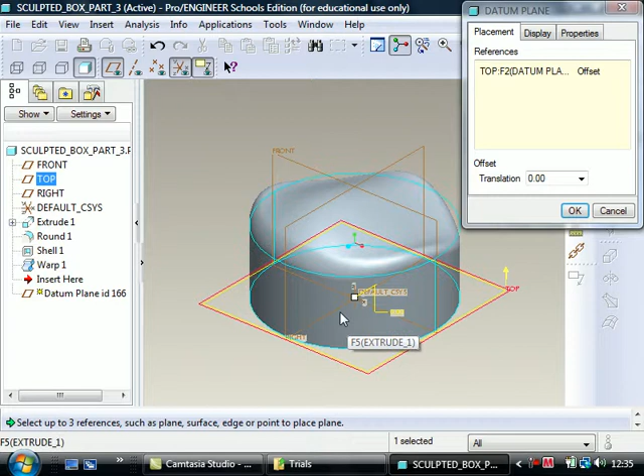To do this I need to create a work plane at the distance from the base of the box at which I wish to split the box in two. I'm therefore going to distance that from the top work plane, and I can move that up either with a grab handle or by putting in dimensions.

To make it a little bit easier, I could change the view, so I'm looking at my design from the side to see, just to check how it is working out. I can use the view option to achieve this. So you can see I've now found the lowest point in the sculpted top of the box, and therefore I can move the plane down accordingly.

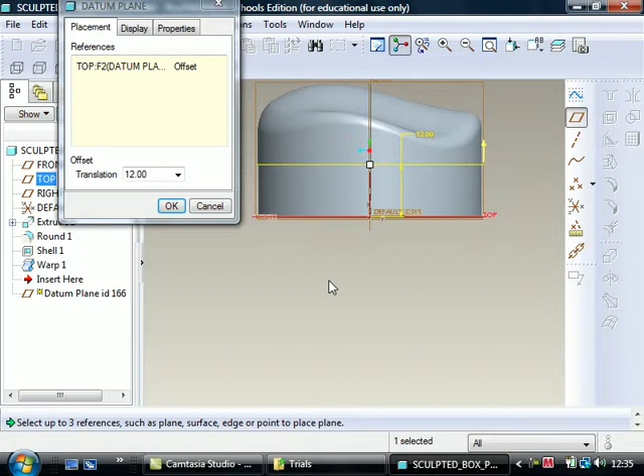Now I decided from that to make it 12mm up from the top datum plane, and I OK in the window for the datum plane. I can now go back to trimetric view, refit the design, and I'm ready to actually cut the two in half. The next stage is to create an extrusion.

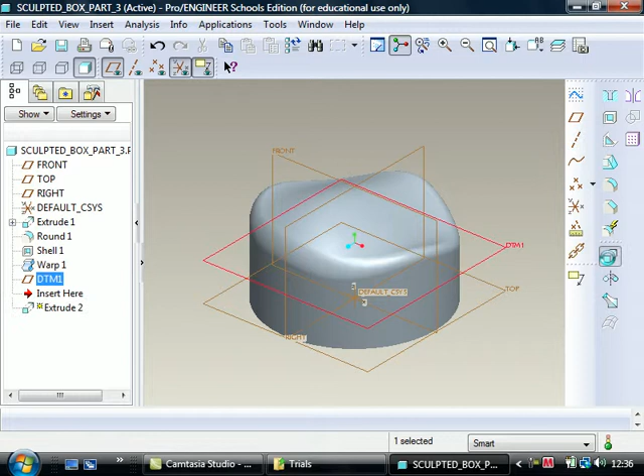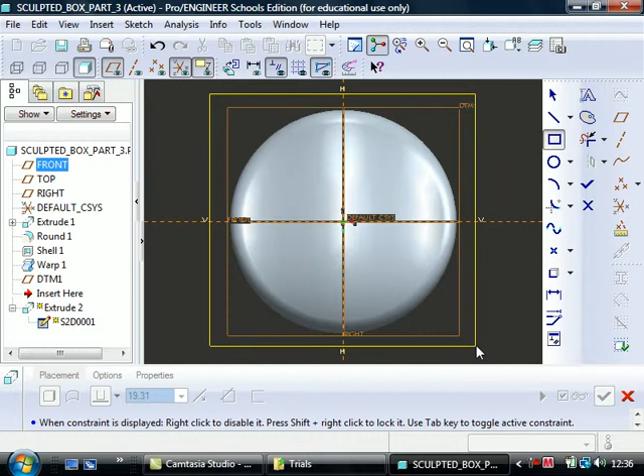That extrusion is going to be placed on the work plane. I'd already selected this, so it automatically goes to the sketch position, but I'd still have to click on the sketch box. And all I do is create a rectangle which fits outside the box itself. When I've done that, I can click Done in the right hand tool chest.

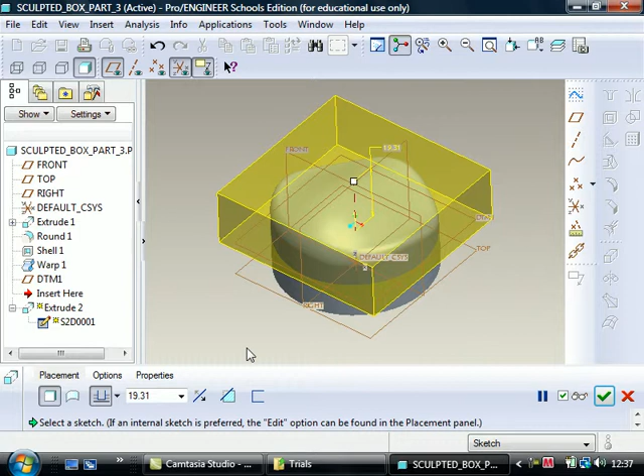I can then change the view to trimetric, refit, and I can decide how I want to do that. At the moment it's moving upwards, and as we can see, it is above all of the shape of my box. And what I'm going to do is use that to remove the actual top or lid of the box. To do this, I quite simply click on the Remove Material option.

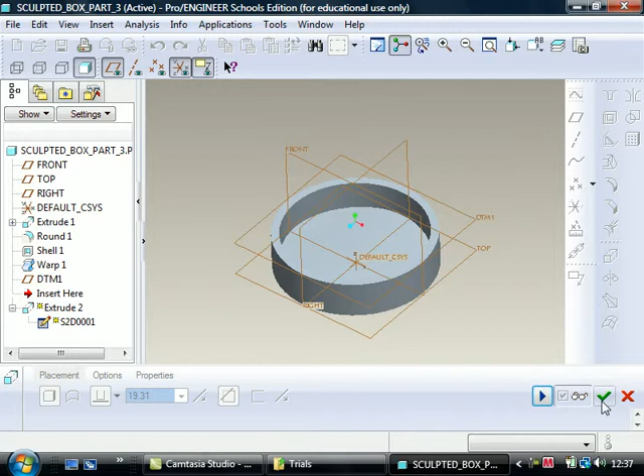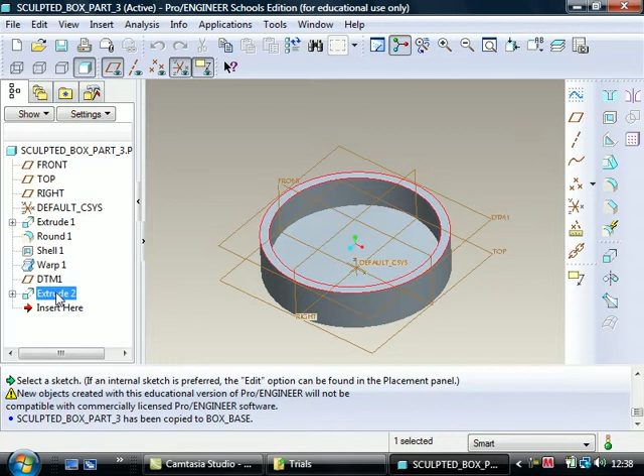I can then right click on the extrude that I used to remove the top of the box, edit the definition, simply change the direction of cut, make sure that it is enough to remove all of the bottom of the box, preview it, looks fine, green apply tick, and I have my top of the box.

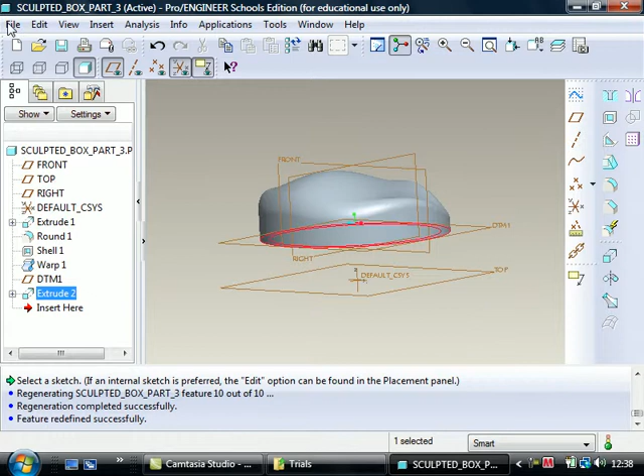Now save a copy, obviously this will be box lid. We have now finished this part of the exercise.